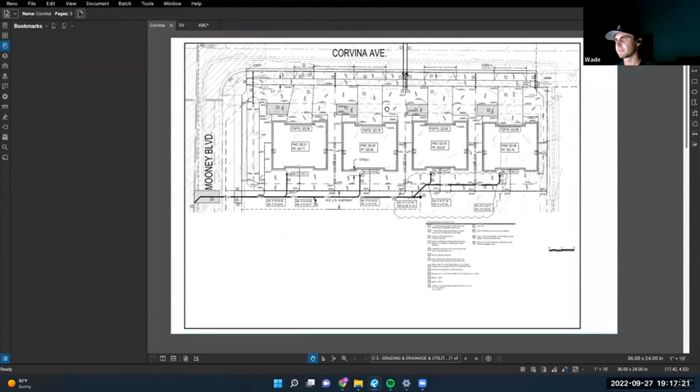So the site plan is actually pulled up. Wait, your screen's not sharing. Oh. Thanks for that, there you go. I got Bluebeam up. Yes, perfect. Is that on the right screen? Can you guys see it? I don't have the Bluebeam. Yeah, it's on Bluebeam right now. Perfect, thank you.

So yeah, a site plan can be used for multiple things: for phasing, for logistics, for crane plans, lots of different things you can use them for. It depends how many phases you want to put into your project—you can really get as detailed as you want. Typically the phases are spread out through different mobilizations. I pulled up this one; it's one that I had done in college, but it really goes into detail, and I'll touch on all these details that are in this site plan and go through this. It should give you a general idea of just about everything you can do. I'll show you things I did back then in college and things I would look for now.

So this is a project called Edgewood High School. It's in a town called Covina, down south in LA. We were tasked with making a site logistics plan for it. One thing you noticed right away was that we had to build it during school, so we couldn't utilize the school parking lots. We had to figure out a way to get everyone to site—everyone building the actual project—without interfering and putting them in the same parking lot as high school students. It's just one site logistics thing you're always going to have to figure out: parking for your subs.

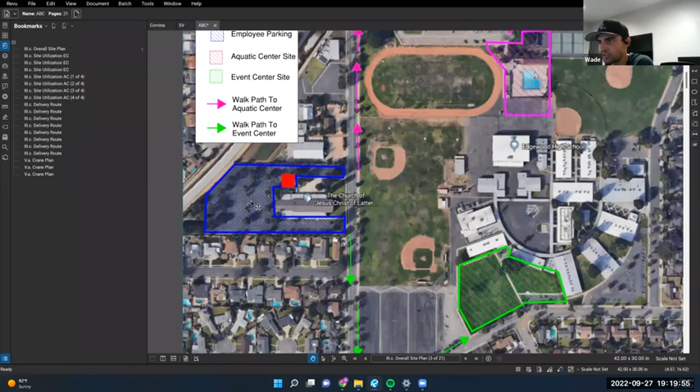Maybe this wouldn't have worked in real life, but maybe it did. We made the assumption that they weren't using this during the weekdays. It's a church, so we assumed they're using it mostly on Sundays and not as much during normal business hours. So we decided to make this our parking lot.

That, of course, is dependent on discussions with them and everything. Again, just a Google search, looking around, designating that this would be something you'd send out in a bid package or during the contract phase when getting all your subcontractors on the same page of where it's okay to park. You don't want your subcontractors pulling in or parking on the streets in the neighborhood, and then from day one you're in trouble with your owner because you didn't coordinate that. So definitely something that's important to do.

You can see up here we have a legend. We have a muster point, and that's basically if there's an emergency, this is where everyone's meeting, and that should be established beforehand. Everyone on site should know that, whether through a safety orientation meeting, which is held for subcontractors the first day they get on site, or if it's posted on a job board. You should always specify where your muster point is going to be and make that clear. It's a big safety factor.

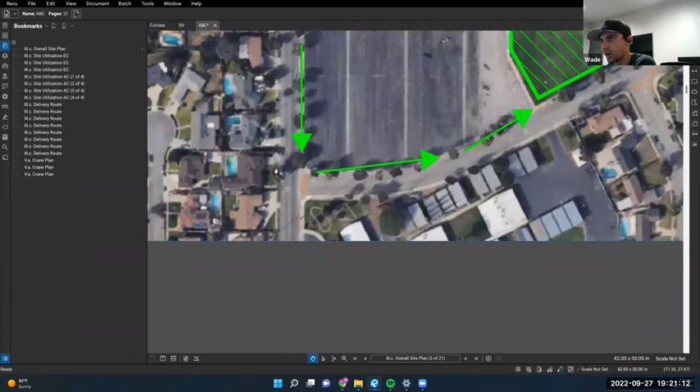One thing looking back on this is we had these arrows going, and right here there's not a crosswalk. All these arrows were on this sidewalk, so you kind of just assume that they jaywalked right here, or maybe went to the crosswalk. But another thing you want to specify on your site logistics plan is just safety standards.

When I worked in downtown Denver, I remember I was on this street and me and my friend were grabbing lunch, right across from where his project was at. There's no cars coming, and he won't jaywalk. I'm like, dude, come on, let's grab lunch. He's right across the street from his site, and he went across anyway, because his company had a policy that if they jaywalked the crosswalk right next to their site, they'd get a safety violation. They could get kicked off site, no pay for the rest of the day if you're kicked off site. Just something to consider.

You want to make sure that not only do you find somewhere safe for them to park, but also somewhere where it's...

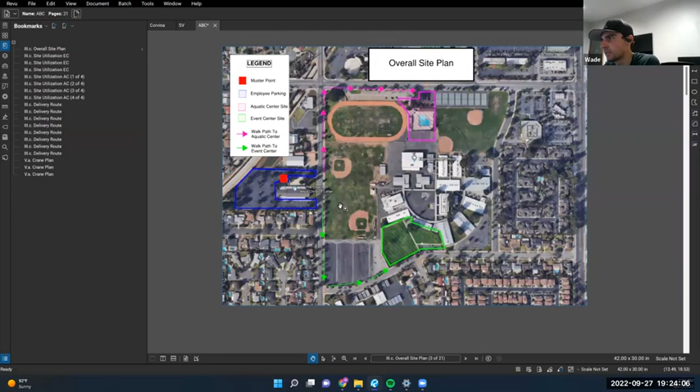Some muster points are across the street. They could be right here in this parking lot. We just decided to put it back in that parking lot where everyone's car is at. It's basically somewhere where you're taking attendance of everyone on site. If you're running a good checklist of who's on site, all the foremen for the subcontractors should know who they have on site every day. So you're just taking a head count there.

As far as the Google Earth, you can use both, and you'll see this is just an overall one. We didn't have a construction drawing that had the surrounding neighborhoods on this. So for the overall site plan on how to get to these two different projects that we were doing, we decided to use a Google Earth photo.

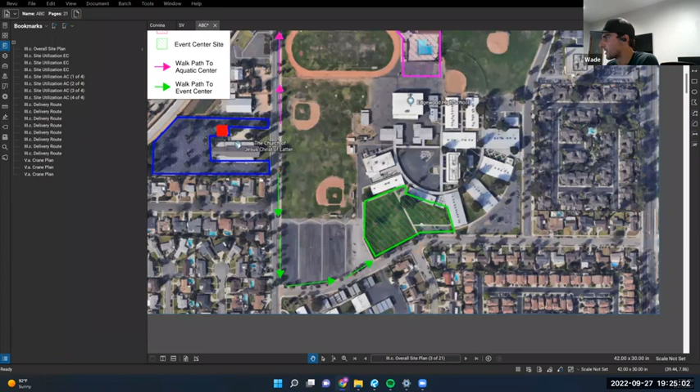Typically, the construction drawings are easier to put to scale, which is nice when you're deciding how big of a trailer you can fit on site and everything else. You do have options on how to scale a Google Earth image, so that you could scale it on a Bluebeam PDF, because Bluebeam does give us the opportunity to do that, which is another cool feature. So I'll continue into the next page.

So like Christy was saying, now we have our phase 1 site. This is based on a demo sheet. We basically are taking this demo page and we're inputting shapes. I keep my shape tools right here. You can go to your views, and you could drop down every single tool around so that they're easily accessible.

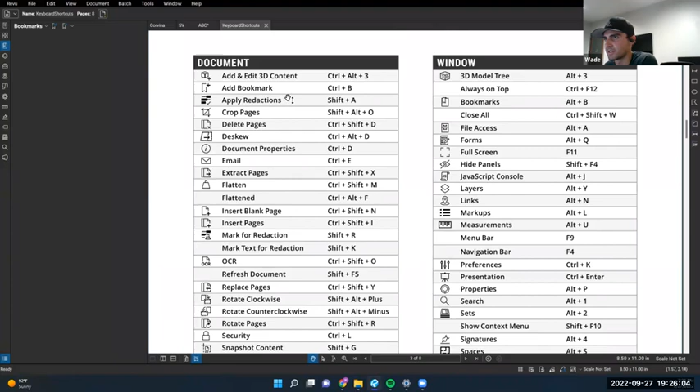Something I highly encourage everyone to do is go to this help bar, go to this keyboard shortcuts guide, and learn these shortcuts. This is a very useful tool. It'll not only show you exactly what you're able to do in Bluebeam, as far as aligning all your markups to the right or left. There's so many things that you really don't know how to do. This guide actually does a really good job of organizing stuff, like documents and navigation, and then showing you shortcuts so that you don't need as many buttons obscuring your vision when you're using the desktop application.

So this was the project that was on the south side. This is the event center right here. And so we did an area of construction in orange. And so we're doing the parking lot. This is roughly where the event center is going to be.

We included a spoils pile because the activities that we're doing are demolition, clear and grub, grading, foundation, utilities. So the spoils would be for all the clear and grub and some of the grading, if it's a cut site or a fill site. We did a dumpster right here, and then you try to line those up so that there's space, so that they're to scale, and try to make it clear on the path of travel for the dumpster.

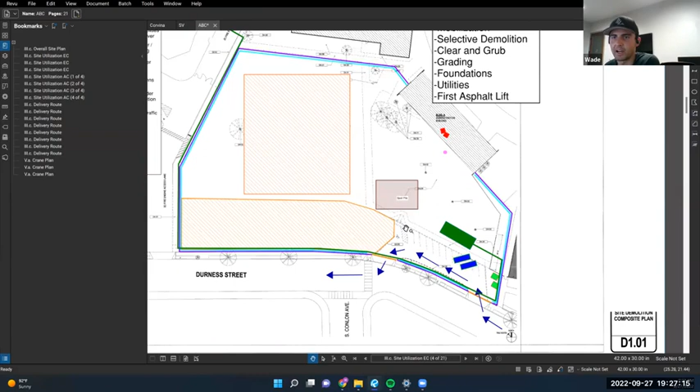One thing that you want to do is do minimal damage to your curb and gutter. Some sites you'll drive right over your curb and gutter during your phase of construction, and then you have to go back and pay for that, and it's hard to fit that in your budget. Typically that comes out of the GC's dollars that they're supposed to be saving.

We put everything as far as the porta-johns, dumpster, recycling can be found right here, job trailer, our flow of traffic areas, our control points. So this is where surveyors come out and take their elevations. This is something that you kind of want in the corner of your site where it's not going to be touched very often, and it'll have a benchmark elevation.

The orange is representing gates, so entrance points, and you want to specify those again just with your path of travel. SWPPP, a silt fence around the site - SWPPP is something that's pretty strict, pretty much everywhere. You just want to make sure that you're not getting any dirt or oil or anything inside the city storm drains. And then site fence and temp utilities. This was a while ago, so I don't remember if we found something to pull temp utilities from, but that's a pretty long pull. You don't always have the option for temp utilities, but when you can, it's always nice.

And Wade, yep, I have a couple questions - just simple questions that maybe you could describe. There may be some students that are not as familiar with these terms, but maybe you could describe what a control point is, and then what we mean by a spoil pile.

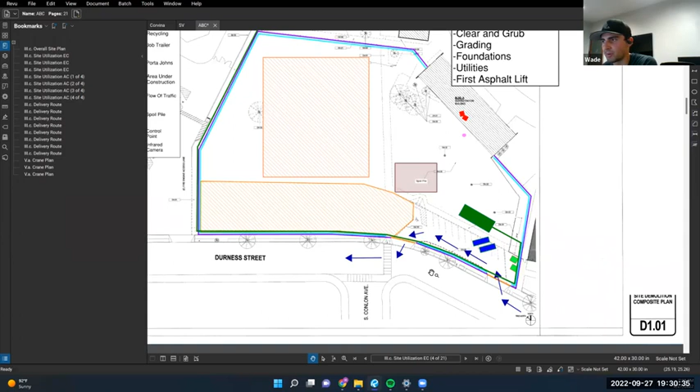I've worked on a project in Denver where it was like the next building over. There was our construction site, there was a business already going on, and then there was a little slot where someone owned the land. We put in an offer to lease this basically dirt lot and put our construction trailer on it for the term of maybe 18 months.

That's another negotiation that you have a lot. If you see there's a dirt lot next to you as a contractor, you're typically finding out who the owner of that dirt lot is.

For example, this is one project I'm doing here in Visalia. The satellite view is really cool right now because you can actually see where we put all our underground plumbing, as well as our foundations. So we own up until about right here, and this is a pretty tight site. We do have some storage on this north end, but we made some bullpens right here.

So the owner of this lot right here was actually willing to let us rent this, and we put most of our lumber right here. That's a negotiation we had to have. This lot, I'm surprised there's a pile of dirt there because the owner - this was probably the end of it - didn't really let us put any materials there. That's just how it goes.

So our fence right now actually extends this way, and then it'll go like this. This is where we keep a lot of materials, and then it'll wrap the site. Again, just going into that negotiation aspect of your site logistics - this is typically done right as soon as you get the job, when you're figuring stuff out, or even when you're still bidding maybe against other general contractors. You're just trying to figure out where you're going to put stuff.

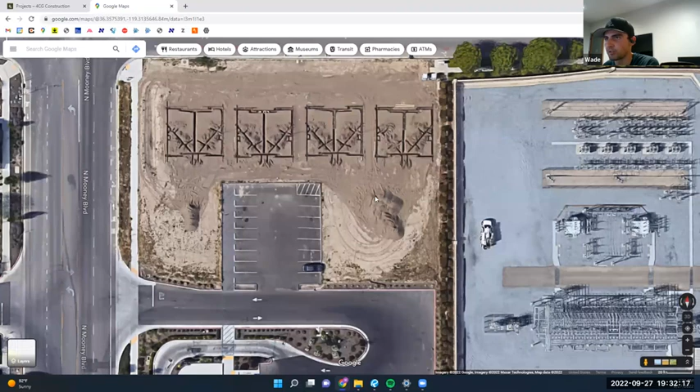So you're calling landlords, owners of land around you - something to definitely hop on and utilize. We live in the Central Valley, and a lot of work is in Visalia. There are lots right now that are going to be next to it because a lot of it's developing outward, which is kind of exciting, kind of nice. There are construction sites called zero laydown sites, and I'll show you one that I was on.

Wait, let me ask - are a lot of zero laydown sites where there's just less storage for you to use? Or are there smaller layouts?

Yeah, so this is one that I had in Denver - this is actually the one I was talking about. Our job site trailer was right here. This is just a commercial building that's in business, and then we were building this apartment complex right here. So we didn't own anything around this actual building footprint, right? So this is a zero laydown site.

And so you don't really have anywhere to put that material. For a lot of phases, that material is being dropped off the same day that it's installed, all the way while it's built up for the most part.

We're lucky on this one because this is a parking garage entrance, and 2 floors down is parking garage. So we were actually able to put a lot of finished materials after we were built up, drywall, cabinets, and everything, and organize that within the parking garage at some point. But for the most part, when we were going vertical, it was zero laydown.

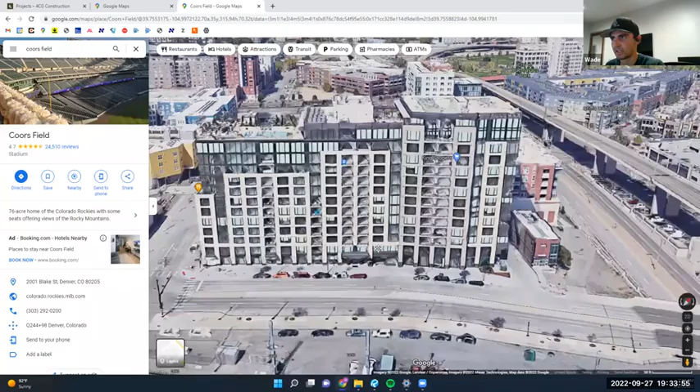You're going to see that a lot in big cities. I'm sure even if you're building in Fresno, you're going to run into a lot of projects where you just don't really have room. The strategy to beat that is you're going to want to just deliver stuff same day.

And Wade, it's almost like a just-in-time delivery. So, I know you're from Oakland, so the deliveries literally just get dropped off, and then you'll see it. I see it more, Wade, both in the city and if there's one-way streets, I think with just-in-time you see more of that zero laydown. You've got a postage stamp basically to deal with.

I know up in the city it's like that in San Francisco, LA, and if you spend a lot of time in San Luis Obispo, there's a couple projects down on Marsh Street that are one-way streets, and literally there's no place to lay down. So the scheduling for those jobs is really tight and the logistics plans are really tight.

To add on to that, I did see a project in San Francisco that was very closed off around many other buildings. Like you said, it had a one-way road, and they ended up having a lot of materials inside of cargo freights that they borrowed, and they would take them down or lay them next to each other.

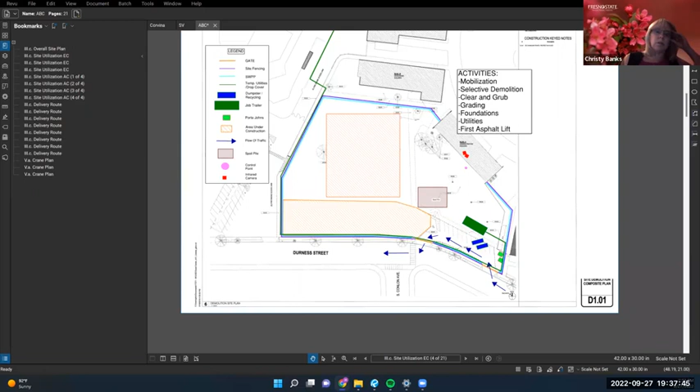Trying to find one project I was on in Denver, it's pretty common for them to crane a porta potty onto like the 15th floor while you're building slab on deck, moving up, depends how high you get. I don't know what floor that starts, but as they keep tower craning the building up, they'll add one extra, and maybe they still have the 10 downstairs and everything, but I've seen that before.

Hey Wade, I got a few questions. First, could you speak on your color coding and your hatch, if there's any universally acceptable hatch or color codes for site layout, whether it's orange or green. And second, could you speak on how accurately you need to scale your site layout trailer and trash can, like not just making a fat rectangle and throwing it down?

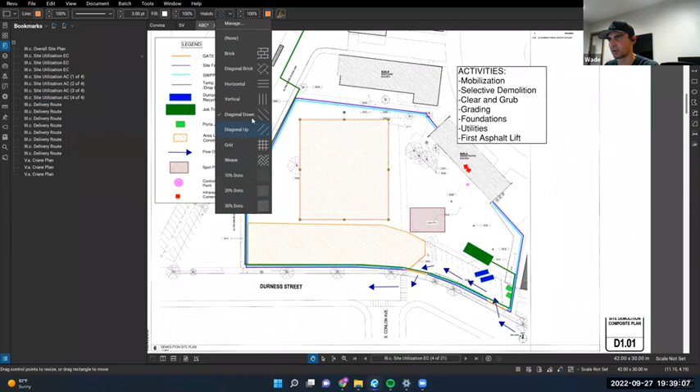I would try to get it as accurate as possible. I'll go into the design on how to make this a little bit clearer. So Hatch gives us a couple options. Nothing's too universal for the most part. Typically these dash lines represent something to be removed.

They'll copy some architectural details, like a brick wall weave or grid. Nothing's too universal, not even the color. I use the dots for dirt fairly often as well.

One thing we didn't use was site fence. You have line options here, and one of them is actually fence lines, circles or squares. This is how architects draw them.

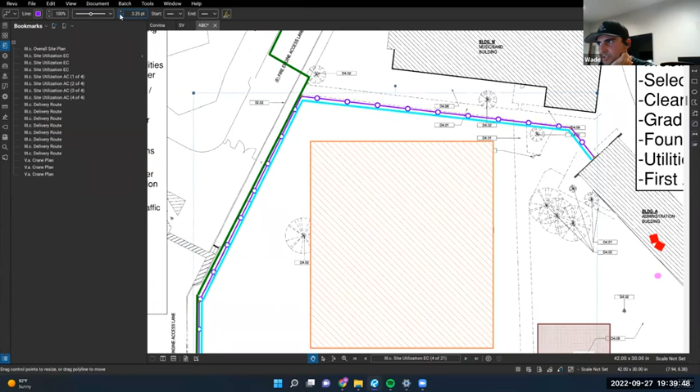On Bluebeam you can adjust the spacing in those to make it look more realistic, so you can tell that purple line apart from your SWPPP and where your temporary utilities are coming through. Different annotations have different things you can do. They'll call some out like insulation, hot water, gas, with different dashes, and again these mimic a lot of the architectural lines there are.

One thing I'll touch on too is this legend. It looks good for a presentation, but it's definitely not the most efficient way to do this. Bluebeam gives you the option to make a legend.

The way I typically do these is I'll go in, there's a gear right here, and you change this to the name. So you can name it 'area of construction.' Once you change that subject, it'll save that.

Now I'll go to this thing we just have as site fencing, and you can click on multiple things. Then when you make your legend, right click, create legend. I didn't click on the right one, but I'll add this to the legend. Now it says 'area of construction' - it's taking the name I input into the subject and populating that.

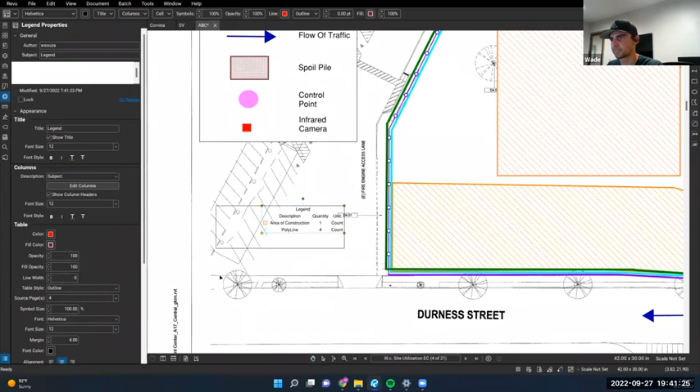The difference between these two is that I have a quantity, which is nice if you're doing a takeoff and have a count, but I don't really need those for what I'm using this for right now. On this legends tool, if you go back to your gear, there's an edit column, and you can choose all these different options for your annotations. I don't want the quantity and I don't want the unit of measurement, so I'm going to remove those.

Now it looks a little cleaner. I could fill the background and make it white, and I can even add an outline to it like that one. This is how I typically make my legends - it's a little more efficient, it automatically spaces these and for the most part makes them pretty well. Whoever made this originally, it was probably just a pain for them to line all this up, so I definitely recommend that method for making legends.

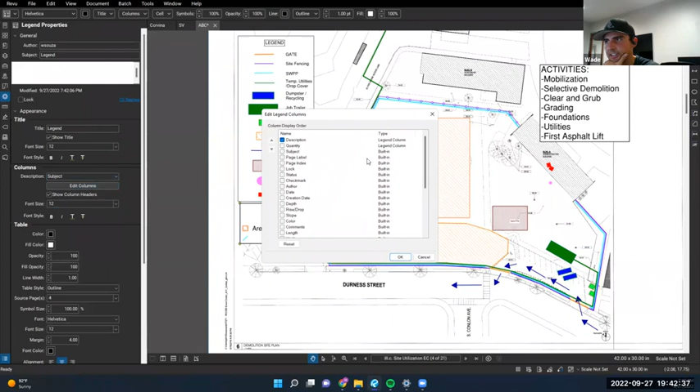The legends tool is something I'm not super familiar with everything it can do, but I do know that just editing these columns you can get a lot of different stuff. You can change the title too, and it'll auto-populate that. It's just a faster, cleaner way to do this - basically what you want to do is just go through everything you put down and name it.

All right, so I'll move on to this phase 2.

So I had a quick question - do you ever use the tool chest? Yes.

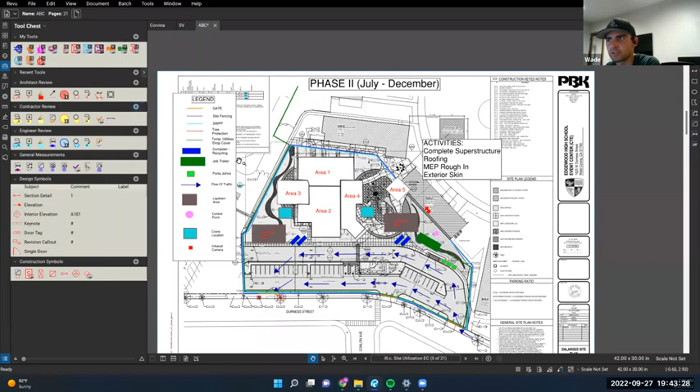Very, very rarely do I use the tool chest, but I do use it for estimating or quantity takeoffs. What I have in mind right now are mostly just custom counts. Whenever I'm doing an electrical takeoff or something, which I was doing today, I'll show you how to make one of these. The count tool - this is getting a little off subject, but it's still very useful if you ever do quantity takeoffs - gives you the option for check marks and everything. But sometimes I'm going to have 20 different types of things that I'm counting if I'm doing an actual takeoff on a page.

So what I'll do is press G, which is actually snapshot. I believe you can also access it here.

And these will tell you what keys give you these access. So I'll press G, I'll go through, I'll paste it.

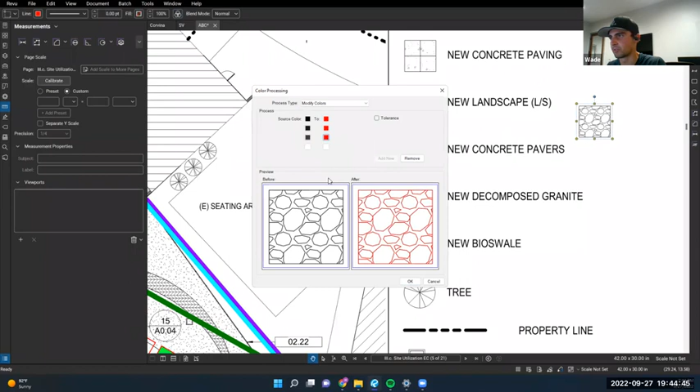This is another useful button right here, a blend button. What this does is populate every color that's in here. So there's like 10 different types of black. I want, when I take this off, for it to show up as red, and maybe I have something else showing up as blue for a different item. Once you have that mostly red to where you want it, you go down.

This is basically the only time I use my tool chest, is I'll add this to my tool chest. It'll pop up here, I'll right click that, and it gives you a couple options. You can duplicate it, you can create a count. So then I'd go through and say, just say this is an outlet, and I have outlets like all throughout the building. I'll just take that count.

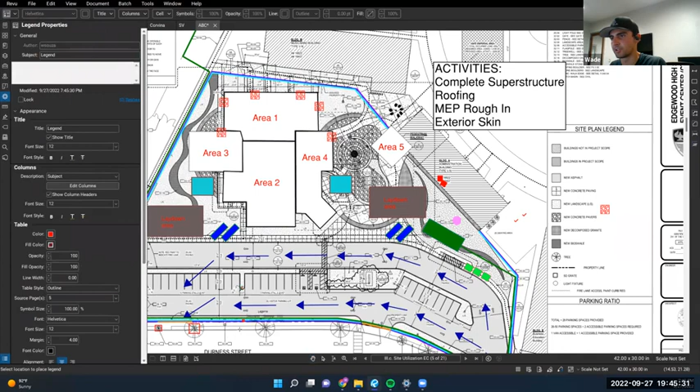And then again on this legend tool, I'll show you. I named the count outlet, and then I'll right click it, add it to a legend. And then it'll actually populate in your legend that exact snapshot that we originally took, and tell you how many counts you just took.

That was a lot of buttons, but this is recorded, so it's just a way that I like to use count on Bluebeam. Kind of a crazy workaround to get to that, but pretty useful. That's the main thing that I use my tool chest for. Other than that, I don't use it too often.

Okay, so for this one, phase 2, I was right, we did add dumpsters. So we're showing that dumpster recycling. Looks like we added one porta-john, maybe just more people on site. When you're doing earthwork, you typically don't have too many people on site, they're just driving that heavy machinery around.

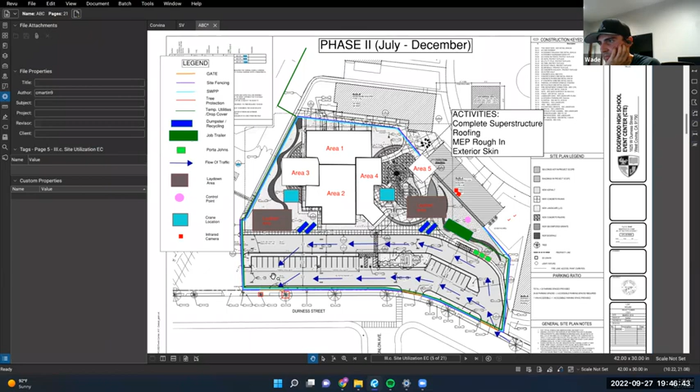And then when you start framing or doing anything else, there's going to be a lot more guys. We kept our flow of traffic, but now we're actually using this whole parking lot as opposed to before. We added a gate right here. Don't know what these are, if they're protecting them is what I'm assuming. We didn't label that though, so just something you want to watch out for. You want to do the least amount of damage outside your construction zone as possible.

Lay down area, so this is going to be for framing material. And then we put some crane locations.

There's a possibility at some point in your program that you go through what a pick plan is, and I'll go through it a little bit on one of these pages as well. But then we list out what activities we're going to do. This is phase 2, you can correlate it to your schedule that you build on just how long it's going to be like this.

The main thing that it's showing is right now we have where we're putting these laydown areas. We obviously can't keep these forever because eventually we're going to have to do some landscaping and site work. And then it's kind of just showing we're replacing our cranes to do these picks.

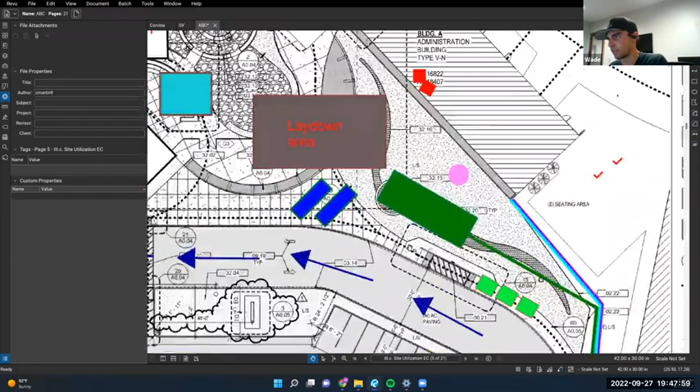The reason it's phased different is just when you're adding stuff differently. It looks like our site trailer is maintaining the same spot, and it's not really in the way of any of this parking lot. It's just going to affect some of the site work that is most likely phased for the end of the project. So again, I don't remember entirely, but we'll see if we maybe even move this site trailer off with a little bit of time left.

Hey Wade. Yeah, I have a question.

On your jobs like this, and I don't know if you've experienced this yet because you're pretty young, have you ever been on a job where you've got union and non-union labor, and you've got to account for a logistics plan having two different gates for the union and non-union workers? I've heard about that, I haven't done a job where I've done both. I've done healthcare, where I've used union, and for the most part I don't have a whole lot of experience outside of healthcare with union or mixing union and non-union.

But I have heard that you do need separate entrances, and so you would basically have two different, almost like two different haul routes on the job, for hauling materials. Well, you know, if you have a two gate system, and they go in and out of the gates, is it just the entrance gate or would it be entrance and exit gate? Maybe Garrett knows too, I don't know if he's here listening.

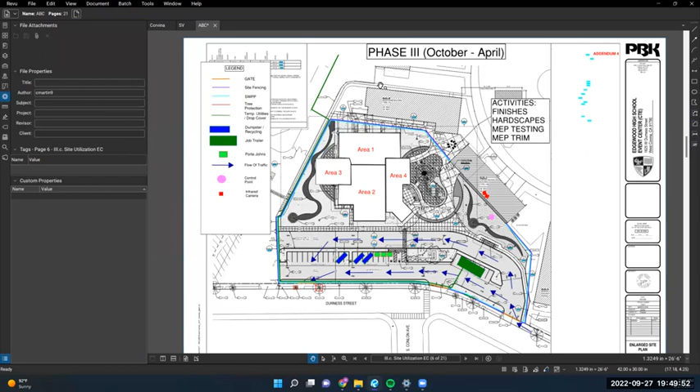I see, so you would have two separate ones then. Yes, completely separate, you can't have them share gates whatsoever. That's something to consider when setting up your job if you have non-union and union workers. You guys, when you get out into the industry, you'll see it a lot for prevailing wage work.

I do have some CM 124 students in here, and some of you in here are non-construction folks. You'll start in the next section in 124 learning about union and non-union work, so I think you'll find that interesting.

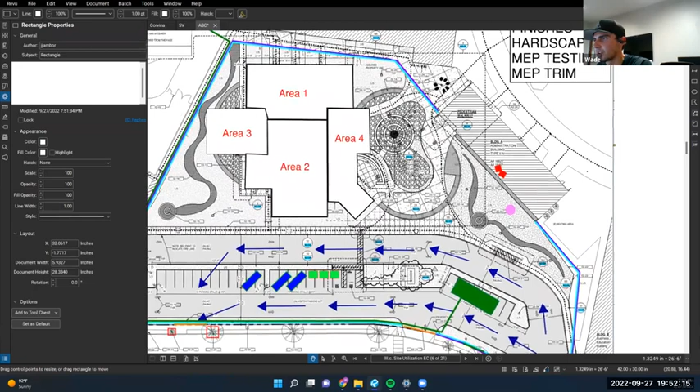Other than that, not too many things changed here. You'll see there's no longer any crane pick areas. All the site drop-offs stayed the same. We didn't designate any material laydown areas - you could probably store a fair amount of it in the building at this point when doing these finishes, and if you have stuff that's more weather resistant, maybe you can find areas around the hardscapes. Just something else that could have been added there.

So this is the pool, it's more or less the same. I'll try to go through these a little bit faster and give you guys some room for questions, because I do have a little bit more stuff I want to show you. Same thing, we're just coordinating this.

Area construction - this is the outline of some of the buildings we're doing. On this one, traffic flow for canopy steel. For our steel deliveries, we want to put them pretty close to where we're building our canopy - that was right here, and I believe there was one right here as well. You'll see what they did here is they just drew a rectangle and blocked this site plan out.

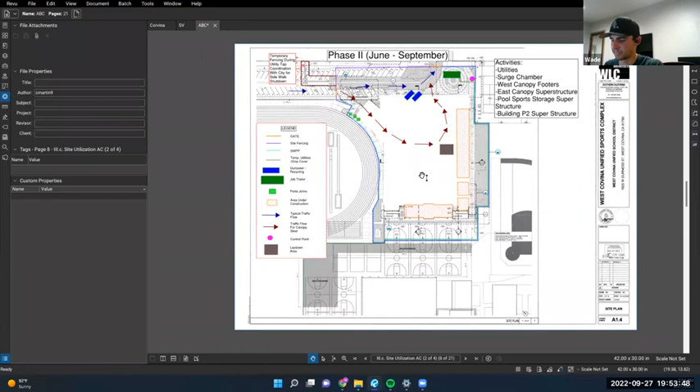I don't like how this is loose - if I know I don't want to ever touch this rectangle again, you can do two things: Control Shift M, or you can go here and flatten this. Then when I'm clicking around on my arrows, I can never click that rectangle again. There's a way to unflatten it through the buttons, but Control Shift U will unflatten it, and then I can mess around with this again.

So it just depends - if you want to move this around, if you want something out of your way, that's a good way to do it. Another way I get stuff out of my way - you can see they did the same thing right here, they didn't flatten that, that's fine.

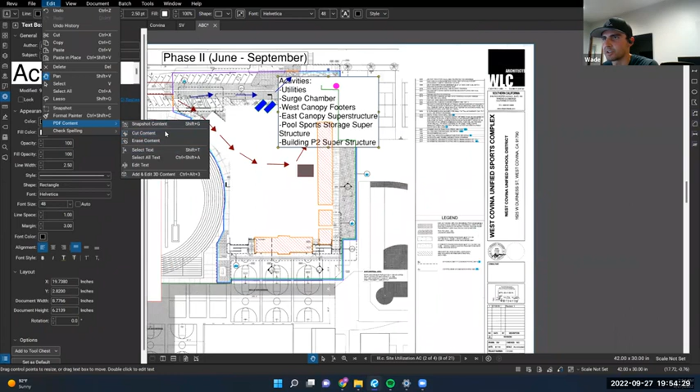If I want something gone for good, you go to Edit, PDF Content. I use these a lot to edit documents - so you have cut, snapshot, and erase. I don't even need any of this on my site plan, so I'm going to erase it, and that's no longer part of the document. There's not really a way to get that back unless I Control Z it right now. So if I know, I'll just get rid of title blocks a lot and clean stuff up - again that's over here in the edits, PDF content. I use these a lot, I'll show you another example of using them. Very powerful tool in Bluebeam.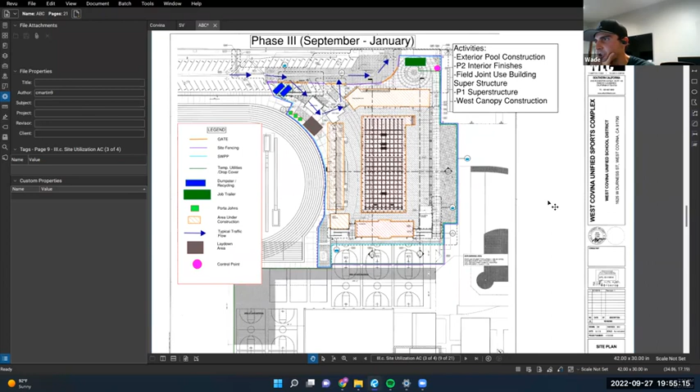When I presented this for my ABC competition team, they said they actually had to demo a building right here, and they had a big problem with homeless people. So something you want to do is make sure your material is closer to where a truck can't easily get backed up into, and keep all your materials safe if you're storing it outside.

Dumpsters are stored right here, easy access for them to get picked up and taken away. You want to angle them so the truck has enough clearance to back in and go away. Looking back, if I knew about the problem with the homeless, I probably wouldn't put my job site trailer right here.

Real easy for them to jump a fence. I've heard about them breaking windows, and then someone put bars on a window, and then they actually cut a hole in the bottom of the job site trailer and broke in again, took all their IT equipment. They'll get in if they want to.

So just trying to make sure you put stuff in a safe location, maybe out of sight, out of mind if you can.

And again, this was a pool. I believe it's like the first Olympic-sized swimming pool in the area or something. So big deal.

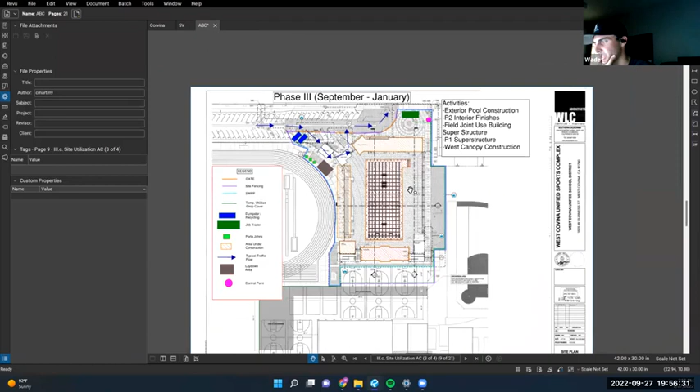Wade, did they have you take off the pool for the ABC competition? Yeah, we actually hopped on a phone call with the maker because it was made in Italy. They gave us the manufacturer for the pool, and they were nice enough to hop on a mock phone call with us. So when we presented to those judges, we could talk all about the pool manufacturer and stuff. That's kind of something that blew the judges' socks off.

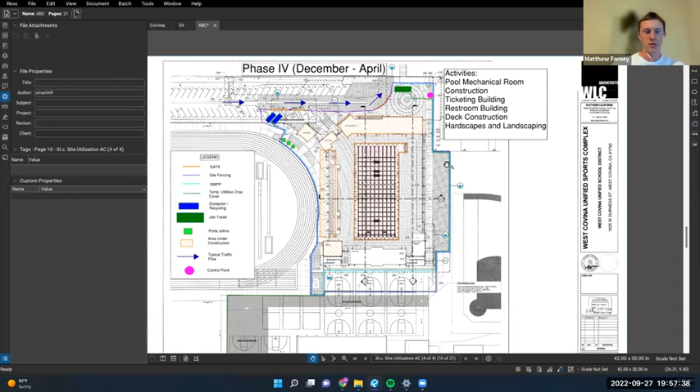We'll have to pick your brain about that. I don't know if you can hear me, Matt, but did the last problem have a pool? I do not believe so. I'm thinking about our hotel project, but I'm surprised they had you take off a pool, that's interesting. So is it a fiberglass pool, Wade? If it was shipped from overseas? I don't remember. All I remember is it's like Olympic size, Italian made or something. It was a big deal for the school in the area to have the actual pool. It was kind of funny.

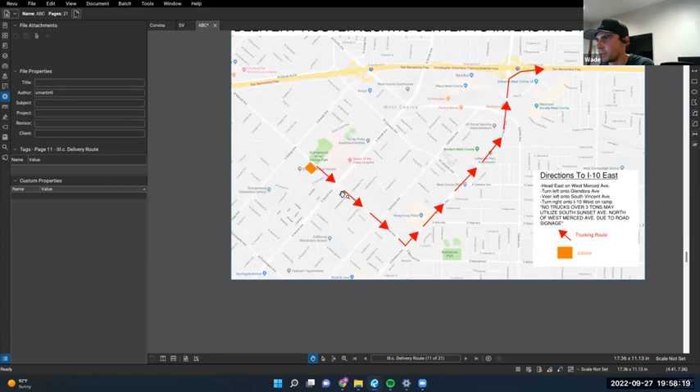Something else we did is delivery routes for both sites, with directions listed out here. This is probably a little less common unless you know you're going through a bunch of neighborhoods, which this school is, and you just want to show them the best way to not bring their delivery trucks into the wrong cul-de-sac.

A lot of truck drivers now have Google Maps, so it probably isn't as big of a deal, but if you want to avoid truck drivers going through stuff, a good way is to utilize Bluebeam. This is just a snapshot of Google Maps, using the arrow tool, which is just A, and then you can edit how big the arrowhead is and how long. Once you have one you like, you can copy paste it and keep going.

I think there's probably 7 pages here. So then this is the other site, these are all for when they're leaving. I believe the intent was to try to get deliveries to do as many left-hand turns as possible and the least amount of right-hand turns. It doesn't actually look like they did that, but typically that'll make it easier for a truck driver.

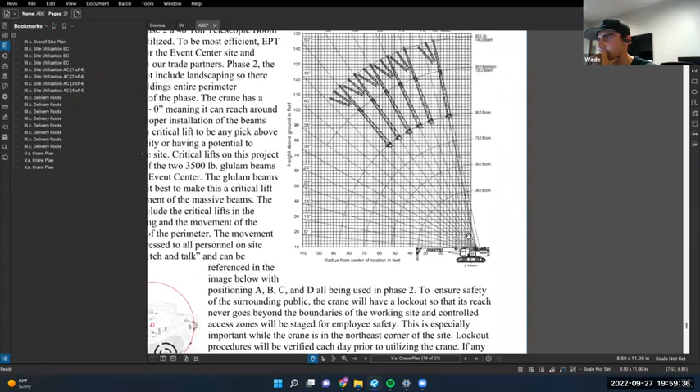I wanted to show you guys a crane pick plan, just because it has this. Any crane you look up when trying to see how much weight it can pull will give you this. It tells you the radius of how far the boom can go and how much weight it can carry out there.

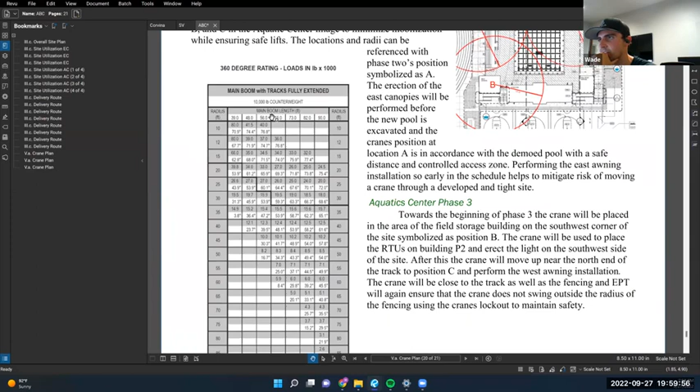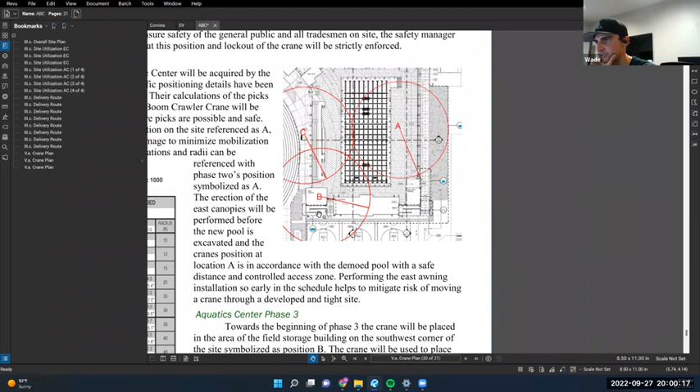I believe that's actually on a table. This shows about how much weight they can carry, times 1,000 pounds, based on how far their boom length is. You'll find this on pretty much any crane you look up when designating a crane. A lot of times the people framing the building will do this, but we did it just to show that we know how. It's something useful to know if you ever go through it. These are radiuses of basically crane pick locations, and I'll go back and show you how to do that.

So we would basically just use the measurement tool. Go through, no measurement set. Typically, architects will put a measurement somewhere on the page, sometimes in the title block, sometimes wherever they call out like the site plan. So to set a measurement, we'll just go 1 inch equals 20 feet.

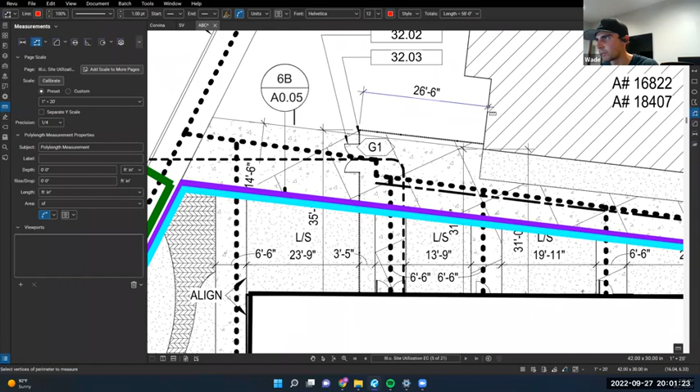Something someone taught me is you then find the biggest measurement you can find and double check it to make sure it's right. What happens is the construction page gets scanned in and rescanned at a different size. I don't know why this one's different because it shouldn't be, but that's why you check. So you know you can't really trust these dimensions too much. This one's a little bit closer. So you just want to check.

So that works. And on this we have a couple different options. I don't know how often you guys use the measurement, but you can do like a length of a fence - the poly length is good on this one. You can just keep it going until you press enter. Another one is an area, so you can get a slab area and it'll calculate all this. Say I wanted to take this off as a slab and put it in my legend, I would just name it like we talked about earlier, like slab, and then it would pop up in my legend.

But the one you want to use for your crane pick plan is this one, radius. So you get the center based on that one page that showed us how far we go and how much weight we have and what our biggest member is. We had a glulam beam right here, so basically we're trying to make sure we can support the weight of the glulam beam we're placing right here based off this distance. And that's how we're setting these crane pick plans.

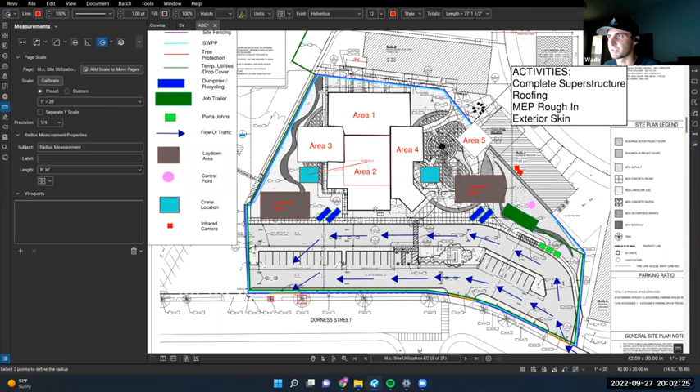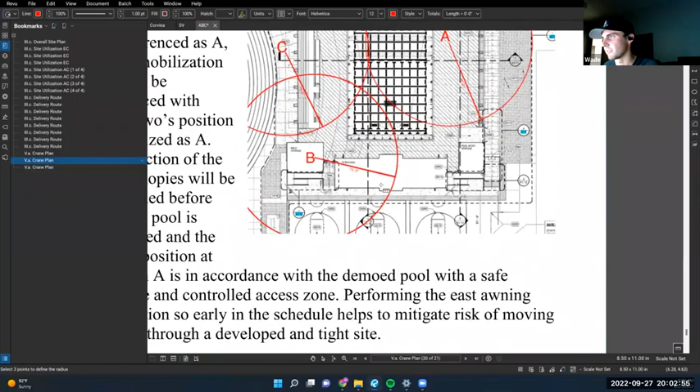For some reason, not doing that one right. This one - this is the one we use. I don't know why that's not working though. Typically it'll populate just these radius circles like we have here, and you can kind of see 75 feet, 75 feet. So you take that 75 feet, then you would find that over here and basically, you know how heavy your heaviest member is and just make sure that it works. There's always a big safety factor on these, but still you don't want to go against what the chart says, or else you have to do a special pick plan.

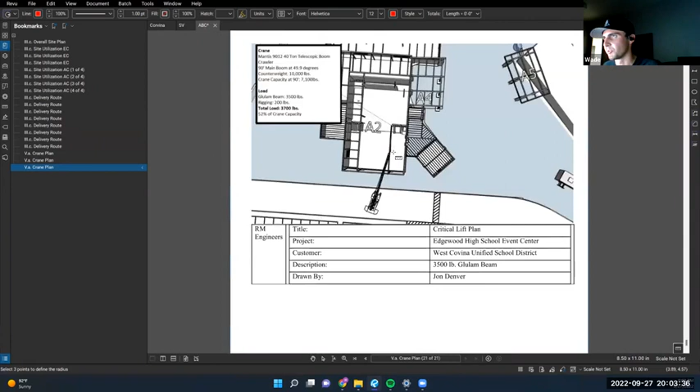And then there's some websites that let you do it as well and they'll calculate it. This is actually based on the Revit model that we made, and then we just threw it in SketchUp and showed a diagram. It probably is even picking up a member there. Not necessary in the real world, but just something different. I like this example, I like that it shows phasing and everything, and just how you're moving some of the stuff around. You want to move it around the least amount as possible.

As far as site logistics, I wanted to show you guys a couple tools that I have used before. For us, this is those apartments that I was doing. This right here was laid out wrong, and it was surveyed wrong. We're on site, and basically what happened was this property line - for this owner, he wouldn't sign his easement, so we couldn't put any of our sanitary sewer line on it. The property line goes somewhere right here. They were stubbed out right against it, and there's no way for us to tell where this is. The parking lot's not drawn on this.

So what I would do here is go to this - I made a blank page already, I just wanted to show you guys this example. So I take a snapshot of this Google Earth, right? I'm suspicious that it was staked wrong.

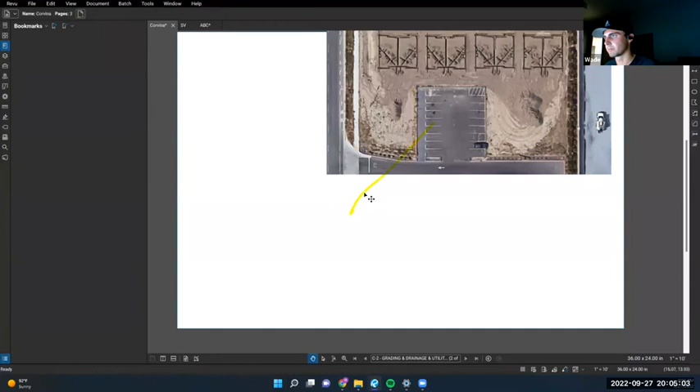I'm going back to my utility plan that's showing me this. I'm going to do the same thing, press the snapshot tool, and take a snapshot of this. Then I'm going to paste this, and I know exactly how I pasted it is to scale based on what's shown on this utility.

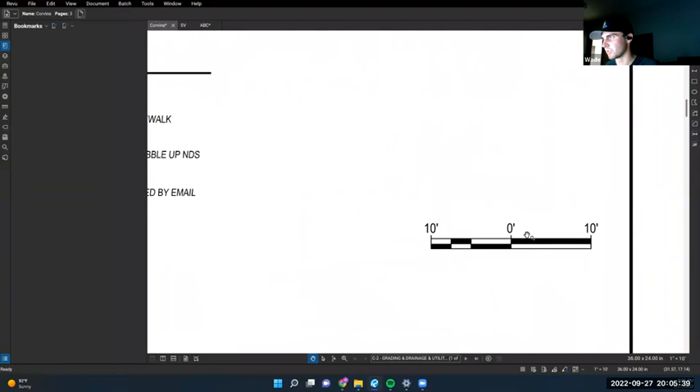This is showing 1 inch equals 10 feet, so I know that if I do not change the size of this construction drawing, I could take measurements off this page. So I went to this blend tool I showed you earlier when making those markups, and I'm making it so I can see this a little better, turning some of the stuff red.

We're pretty lucky because we have this underground, so we can actually match these pads. Otherwise, you're trying to match things like the street and that radius curve in the corner. So then you just want to resize your snapshot image, and basically play around with that until you get it. I already did it because it might take a minute.

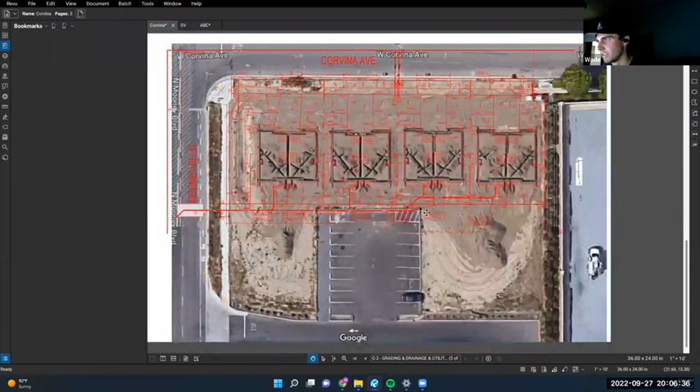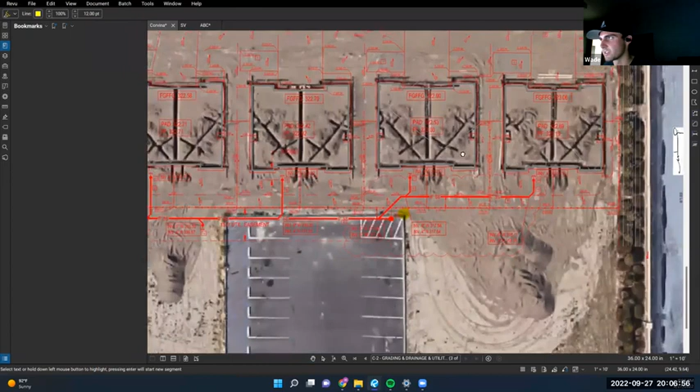Like I said, I was out there on site and I could see this was getting stubbed out right here, and it was on the owner's property. So again, my original problem was I didn't know where we stubbed out compared to the parking lot, and I had a feeling it was surveyed wrong. So now I can size this, get it mostly right, and set my scale up for 1 inch equals 10 feet.

And I can say this was off, oh, this is a wrong measurement. This is just a straight measurement tool. I could say this was off by, you know, it's actually 5 feet, because this is 1 inch equals 10 feet. That's what this first page said.

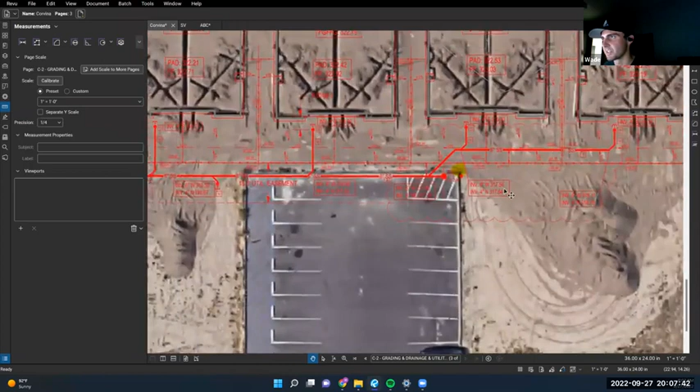1 inch equals 10 feet. Yep. So now I know it's off by 5 feet. I tell the surveyors they need to get back out there on the site, because that's a big mistake on their end, that's your reputation. We get it adjusted, and we lost about half a day on that, but got it adjusted as fast as possible.

Just a way to, again, I would never trust a measurement down to the inch on this, but just a way to use site logistics, Bluebeam tools to lay stuff out, and try to figure stuff out and answer questions that you might have.

And again, I could see just where all this stuff's going to end up, which is nice. It just depends where your Google satellite view is at. We're completely framed out on this project at this point, so this satellite view was probably taken in June. I don't know how often they update it, but got kind of lucky we could use it on that instance.

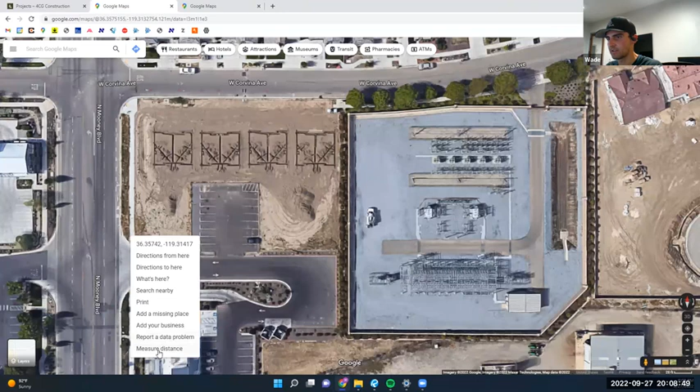Another way, if you don't want to size the Google satellite view, is if you go down here, this will typically be in meters but you can adjust it to feet. Then you take a measure distance, just try to get that as big as possible because that'll dial in your calibration. And then screenshot this.

And then we'll just remove these. Now here's my new screenshot with this Google Earth measurement. Again, it's not going to be exact, but I want to get a decent scale for my measuring, because maybe I'm going to decide where I want a job site trailer based on this dirt lot. And that, so you can do a calibrate tool.

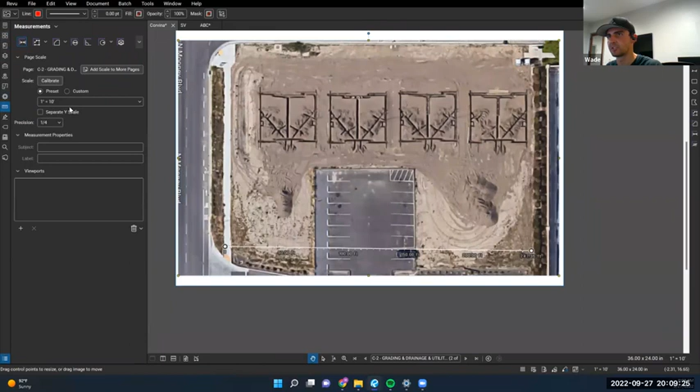Select 2 points. I know that that's 247. So I'm going to try to get that as close to the middle as possible, and go as far as possible. This is basically taking off how many inches on that page sheet you have. And I'm going to put 247.35.

And now what I'm able to do, if I'm making a new job site plan, I can take this measurement, I know that's fairly accurate. Sorry, pressed a lot of wrong buttons. And you can change these, I'm going to make it 30 feet.

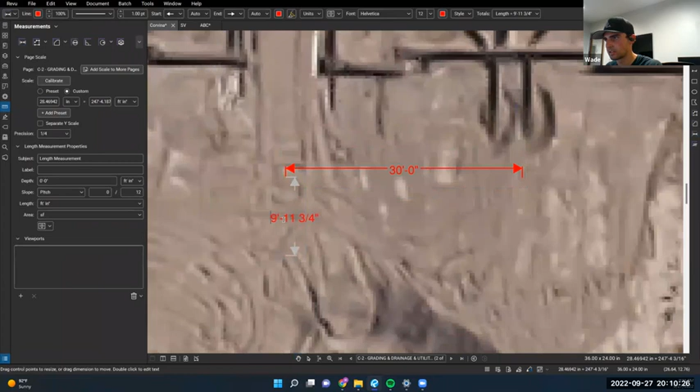Take this measurement. I'm going to make this 10 feet, that's my job site trailer. I know that's how big the one is that I want to order. So now I'm going to get this corner, go to this corner. I now have a 10 by 30 foot, relatively good scale for a job site trailer, just based off Google Earth and plugging this into a blank sheet of paper.

This is good when the lot's really empty, you can get a good idea of how far back on the parking lot I can put this, how far it will be from the actual buildings if I put it right here. Again, none of our drawing pages showed this parking lot, so we don't know for sure where this is at.

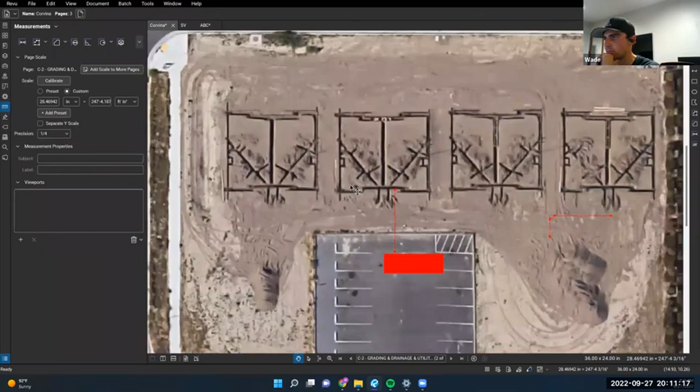Like I said, just integrating your resources into Bluebeam. Bluebeam is a construction software, so if you think there's a better way to do stuff, it's probably actually on there and you're just not pressing the right button. So just keep pressing around.

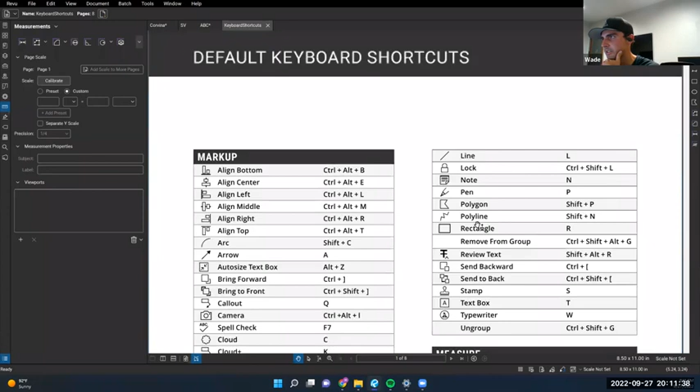I touched on it at the beginning, but this keyboard shortcut guide is really, really big, a helpful tool. If you just have an hour, just go play on this. I used to do that in college to figure out what I can do.

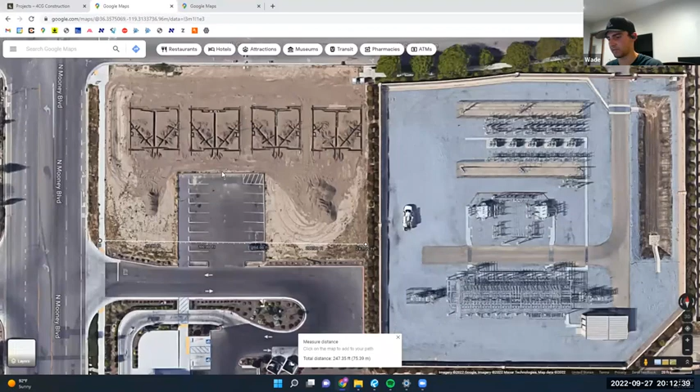Someone told me that every error, every mistake in construction is typically a communication mistake. Bluebeam's a really good tool that lets us annotate stuff, whether it be a photo or anything. I could take a screenshot of this and put it on a blank sheet of paper, and make enough annotations to call out exactly what I need and communicate this as well as possible. Make it so clear that you almost feel stupid for how much you're explaining, because you want to leave minimal room for error when communicating to anybody outside or inside your organization. Bluebeam is a tool that really gives you enough power to communicate all that.

So that's kind of all I got. I'll leave it up to questions for you guys on any tools. I know I touched a little bit on some takeoff stuff. Right now I use Bluebeam for taking stuff off a pretty good amount, but a lot of it is just document control and some of the site stuff.

You guys have any questions on anything? Any tools, anything you want to know? Does Bluebeam do this? Maybe I'll know if it does.

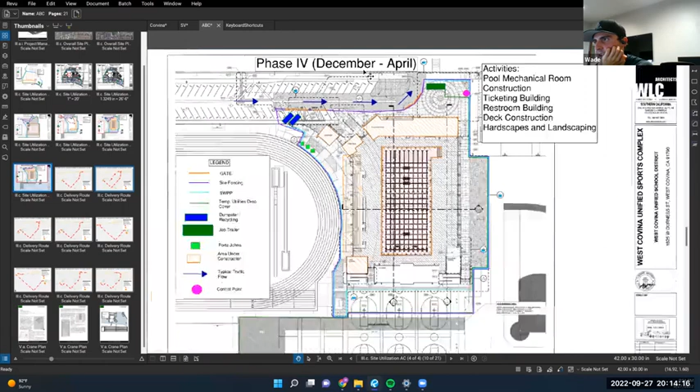You're going to go into your schedule and see what activities you've got going on during these months. You don't have to put everything, when you get to finishes you'll probably have 10 different subs on site or more, so just include the bigger ones. I feel like the event center is probably a better example of this. They kind of sum them all up in finishes, so this is probably taking the place of 10 subs going in, cabinets, flooring, and everything. But yeah, that's basically what activities are going to be going on in your schedule through here.

And one thing that's nice is, like we're mentioning hardscapes, this is the reason for the trailer moving. This is pretty much the reason why we have this phase 4, we have to move our temporary facilities to build this out.

So Wade, I have a question related to the ABC competition, actually two questions. So all of these phasing sheets, did you have that in your binder? And then how did you present that? Because you could spend the whole time just doing this and more, you know what I mean?

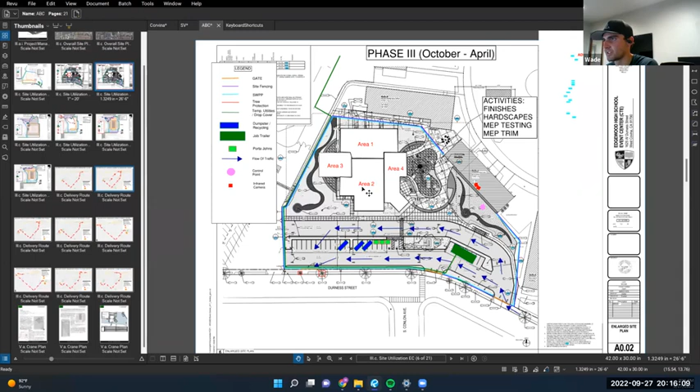Yeah, so all of this phasing, the total PDF that we presented was probably 100 or so pages, and these were touched on in the presentation by the mock superintendent, just because it's good for an owner to get an idea of how you guys are running the site. You're really trying to summarize it a lot faster than I did here, but yeah, you do want to go through these phases, why you're phasing them the way you are, why you have this parking lot over here. Oh, this is actually kind of cool.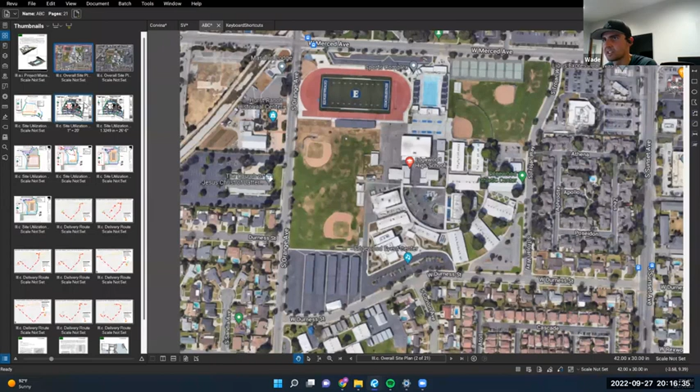But yeah, we basically touched on all of these, and it was a lot because the superintendent had to cover 8 different phases or something like that within a very short amount of time. So you try not to rush through it, but try to explain your reasoning behind everything.

I was trying to find the one where the site plan with the parking lot is... I don't know where that went. We did go through it in the oral presentation.

Yeah, these phases were something pretty important. This is something we touched on, how we're not parking in the school's parking lot, how we communicated with the church and they're going to let us park there. And then you connected your schedule to the logistics plan.

Yep, all these phases are directly taken out of the schedule. They give you an exact, like on this, they gave us when they needed this done. And so we just linked this up to the schedule.

I'm just talking to Matt here because he's going to be doing our schedule. So when you're putting together, Matt, if we do it in Oracle P6 or in Microsoft Project, you're going to want to set up filters and sorts based on your phasing so that you could transfer it to a logistics plan like that.

Yeah, that'd be good. Those filters are great. I know, yeah.

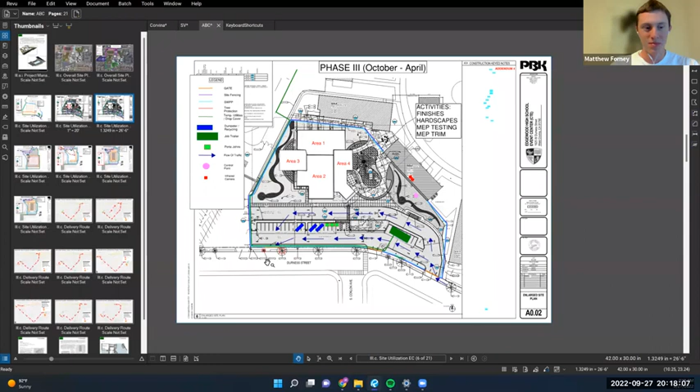The other thing I was gonna ask you, Wade, is so the class I teach, the building construction class, and then I also teach the project controls class, and in both those classes we're gonna either work on a project together or they work on individual projects. One of the things I said to them is that, for not knowing how to do a logistics plan, or if you're doing it on your own, one thing you could do to keep it kind of simple is to have a mobilization plan, your actual construction, and then how you plan to demobilize. Are there any other ways you could simply suggest to set a job up if you've never done this before, not as detailed as this, but on a simpler scale, if you're just getting any job out there?

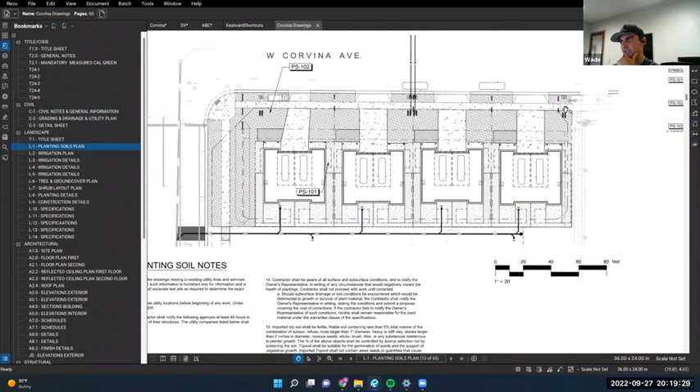Yeah, if I was to do a one-phase construction plan, the 2 sheets I would look at are basically your utility sheets, and then I would look at your landscaping site plan. I would just try to put your job site trailer somewhere where it's going to be moved like 2 months at the end, so find a flower bed, find somewhere, right. So typically it's an L sheet and then a C sheet, and you just want to find the ones that say C sheet, site plan, or something. I would try to put your temporary facilities where you're avoiding stuff. Sometimes they'll have this whole building pad and everything, so you can kind of correlate where you want to put maybe your laydown area if you have that option. If I was doing a very bare bones one, I would reference those 2 sheets.

And if it's your first time, would you just do it all on one sheet? Yeah, I would use a civil one probably. And then like the landscaping one, I would just confirm where the flower beds are, planting places, if that's something that's on the site.

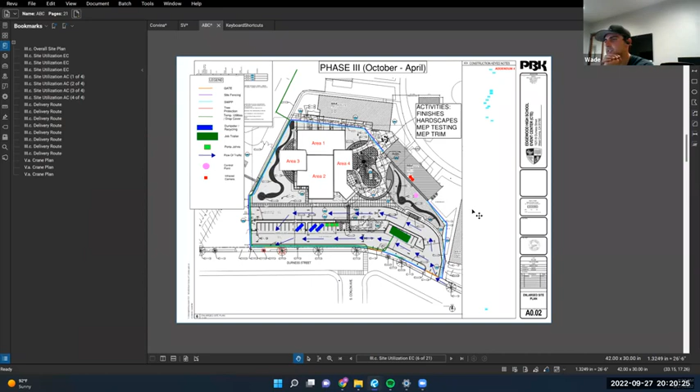But for this one, we can even just use this sheet. This is an architectural site plan, and any site plan sheet would be good. You can tell that the trailer goes right here for the most part, then you'll just have to move it at the end or something. But I would go for the overall site plan.

And Wei, are you still listening? I don't know if you're on here or not. Yes, I'm here. Oh, I'm bringing you in here because, you know, what Wade's done is a very, very detailed logistics plan.

It'd be nice if in some of the earlier classes in our construction program, we taught them how to do it on one plan, then built the layers as we go through, so that by the end of the curriculum they're able to do things like this, if that makes sense.

I think what we need to talk about today is the progress our students need to go through as they move from freshman to sophomore to junior to senior capstone. The complexity and comprehensiveness of the different phases is what we're expecting from students in capstone projects. I think it's a milestone for students to truly understand what logistics planning means after they finish their first internship. That's when it truly makes sense to them.

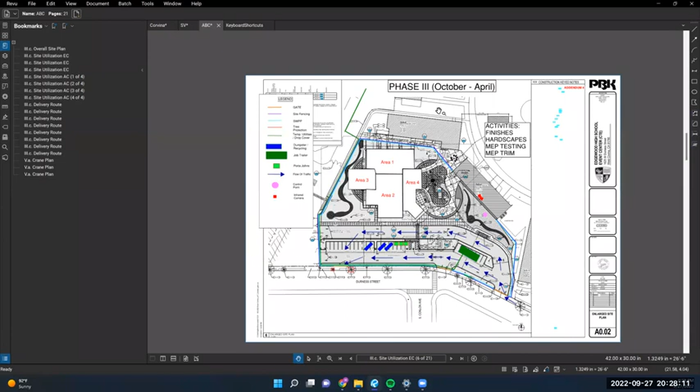To be honest, I would never have an intern design a site logistics plan and then actually use it without modifying it, probably a fair amount. But if an intern like Anthony Sousa, who interned at 4CG this summer, walked up and said, hey, I noticed we moved the job site trailer, why is this? And if he knows that some site logistics plans have different phases he has to see, I would definitely try to take some time to walk them through why we're doing this, a short version, since we'd both be on the clock, why we're phasing this stuff differently, why we're moving stuff.

I think Anthony was really good about not hesitating to ask questions. There's a project manager here in his 60s who's been in his career a long time, and he said, man, that intern really didn't stop asking questions, it's really cool. He didn't say that in a rude way, he said it's cool because he's dealt with so many interns who get on site and are timid. So it's about preparing your interns to ask the right questions.

Like maybe they go in and say, hey, are you able to show me a site logistics plan? Not because I'd have an intern make one of these, I would not have that confidence in them at that point, but it gives them an idea.

Christy, what we can do is in our summer intern course, we have specific deliverables they have to fill out, mostly daily reports, weekly reports. We could add assignments in that internship course asking students to present a site logistics plan for the phases they've been working on during the summer. We could ask them to do two: one at the very beginning of their summer internship, and one when they finish. Comparing those two, with help from the project managers and supervisors, they should be able to present something and help us understand their knowledge level about logistics planning.

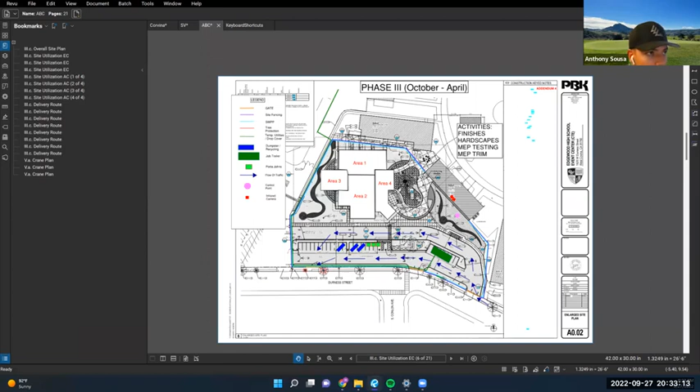Yeah, Anthony, we are switching the curriculum around a little bit. In our 150 building class, which you're in, we're going to do a big project together as a team, as a group. Then when you get to 170, which comes after that, you actually have to do a project on your own like this, like you've never seen before, every single person different. Jacob's in that class. So we're switching the curriculum around so it builds on this, and that's why I made sure a lot of my 170 students are in here, to give them ideas, because you'll probably eventually get there too when you take 170.

And Garrett, are you still on? Yeah, I'm still here. You might not know this, but I know you guys put your students through two different tracks, one a project engineering track and one a field engineering track. Do you guys include site logistics in there, or do you not know?

I believe we do. I don't think we actually have two strict tracks, it's more based off whatever the student wants to learn about and what they see themselves doing in the future. If they don't know what they want to do and don't have a set path, that's when we give them everything—office estimating, pre-construction, field engineer, as well as project engineer path. But yeah, inside both the project engineer and field engineer path, site logistics would be part of that. Okay great, yeah, that's good to know.

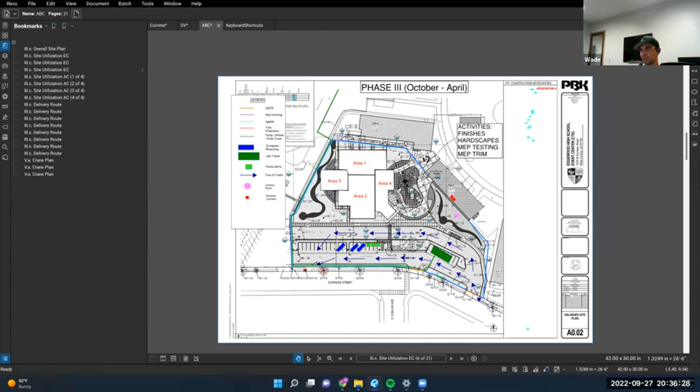When it comes to site logistics, it's more of an art form than right or wrong, because every project is different, and every way you can think about site logistics is going to be different based on how different people think. So everything's just going to be different. There's no right or wrong. It's just trying to justify your reasoning for it and then moving with that.

And if you do mess up, if you miss something - like this crosswalk thing we had on the overall site plan - day one, you would have had someone jaywalk and it would be like, okay, we missed that. Everyone's jaywalking. You make an adjustment, and typically, unless someone gets hit by a car day one, it's okay, and you just adjust as the project requires. It's all conceptual when you're first making these before you start construction, but you try to dial it in as best as possible.

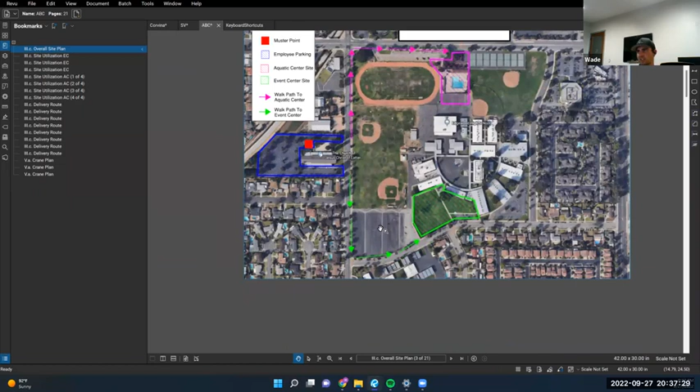Exactly. And those things always continue to change and grow as the life of the project goes on. It's not something set in stone day one that never changes. And it's very low risk if you mess something up.

Sorry to cut you, but it's very interesting to listen to both of you professionals make comments on this, like how project specific the site logistics plan could be, right? Depending on the project, its location, the site, and the phases of the project.

So now I have a very practical question, I would love to have your inputs. For faculty, when professors and instructors are teaching site logistics planning and trying to help students build knowledge and skills with it - in order to give students positive or critical, constructive feedback, because you were just mentioning how diverse this could be, it comes to this critical question: how do we actually grade it? As I was saying, there's so many different ways of doing it. One way or another they could work out, depending on where it is, when it is, how you want to do it, and who is doing it.

So in this case, question to Garrett and Wade, both of you: what would be some of the criteria you would typically use when, instead of designing the site logistics plan yourself, you've been given someone else's site logistics plan? What do you look at? What do you actually evaluate - how logical, how rational the plan is, how reasonable it is? What are some things you'd suggest the instructor look into, and also that students need to pay attention to?

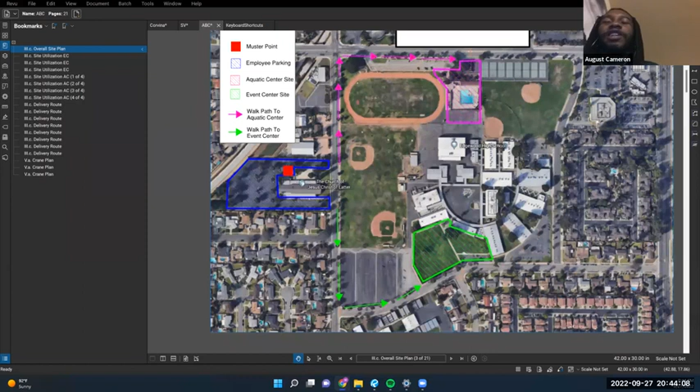I will say one comment I have for Wade is I like how you went in on more of the layout plan kind of topics, where you mentioned site traffic and how normal people who aren't working on the site can still get around what you guys are doing, and certain problems you go through with regular habits that crew members may have. Those are things we don't really talk about a lot, at least early on in the program, when we learned about site plans and site layouts and other logistics plans. We didn't really mention a lot of that, like a lot of safety issues on site.

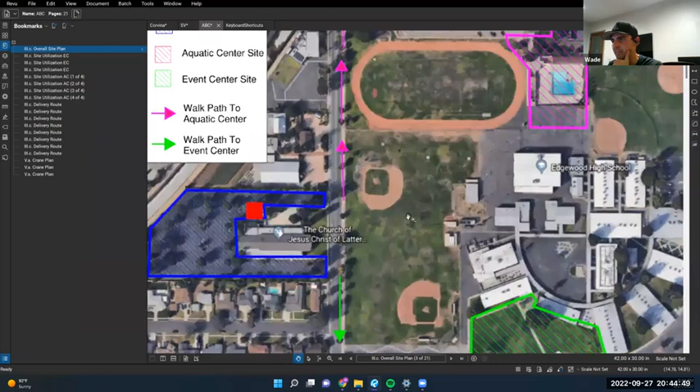Yeah, safety is going to correlate a lot with this. As far as those cranes, they didn't even show control zones and stuff, but you have certain zones, within, I don't know, 10 feet of the crane that you want to set up, and sometimes you'll display that on your site logistics plan if needed. It's pretty detailed, but yeah, you're going to tie in safety a lot. Just crossing that street, everything, pretty important factor. You kind of have to assume Murphy's law, right? Anything that can go wrong probably will when you're working with construction and other people. So just try to make it as simple as possible.

Well, August, that's like even doing the ABC team in August, you might even consider being on a competition team, because these kinds of large projects teach you how to connect your schedule to your logistics plan, to your safety plan. If you've got a muster point or evacuation route on your logistics plan, that should match what is said on your safety plan. They all interact together. I think you learn that more so when you're on a team doing a team project, later in the curriculum or on an actual competition team. This kind of thing is invaluable, especially on a competition team. You learn to a totally different depth than in classes. Indeed.

Hey Wade and Garrett, I had a question. I saw that you guys had SWPPP on there, or on your sweep stuff, I think it was on the demo plan. How often is that on a logistics plan? Is it necessary?

No, not necessary. Some civil plans actually have all that for you, like just erosion control plans. For those that don't know, SWPPP is the Stormwater Pollution Prevention Plan. A lot of times on a regular job, they'll have in your meetings every week discussions about making sure you have this plan in place and the things you're doing. So that's what I'm asking about, how often that's put on a logistics plan.

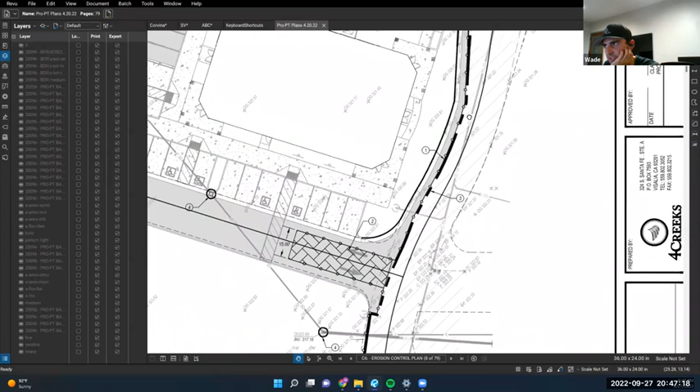Yeah, this one actually gives you a site fence on this erosion control plan. You can see those yellow marks, I talked about it earlier. That's just displaying a fence with different dash lines. This is dedicating your construction entrance. So the engineers are giving you all of this information, and assuming this is a fence, you're just setting up your SWPPP around that. So sometimes it's given, not always needed.

I'd have to ask somebody who's a Teichert or Granite employee, but when you're doing a staging plan, especially for heavy civil, I'd say on every job site I've seen a lot of discussion about their SWPPP plan. But on a heavy civil staging plan, which is the parallel path of a logistics plan - logistics plans are usually done on building projects, where a staging plan is done on heavy civil projects - they're going to be done a little bit differently. It'd be interesting to have a discussion with a heavy civil contractor, like Maria teaching the 151 class, about how we'd do it differently throughout the curriculum.

Oh yeah, I don't have any experience with heavy civil. I'd be curious to see what their site plans look like too. Yeah, and I think that's something we probably should expose the students to a little bit more - a staging plan. If they choose the 151 option, which is our heavy civil specialization, they'll deal with that more. It might be worthwhile to have one of the bigger heavy civil contractors come in and do a demonstration like this for heavy civil projects.